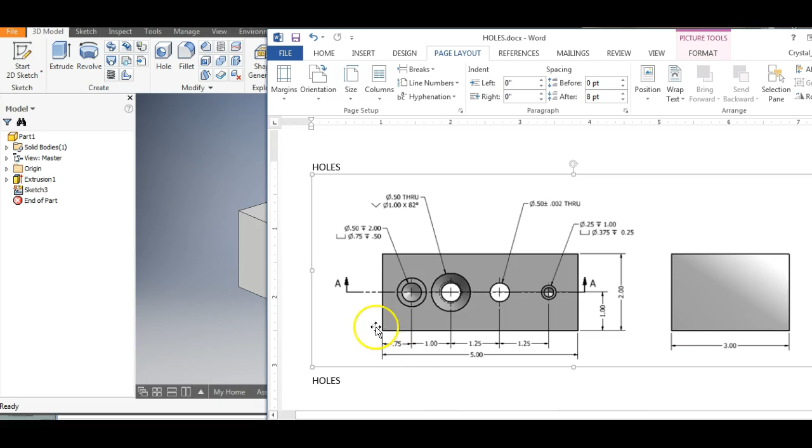Before you make your train, we need to know how to do holes because there's a bunch of holes on the train. We're going to be using the hole feature to make this part. Take these notes and glue them into your notebook. I've already made the basic dimensions and put a point at each one so I can center on it.

I clicked off, finished my sketch, and I'm back in my 3D model. I'm going to click on my first point here, and then click on a hole.

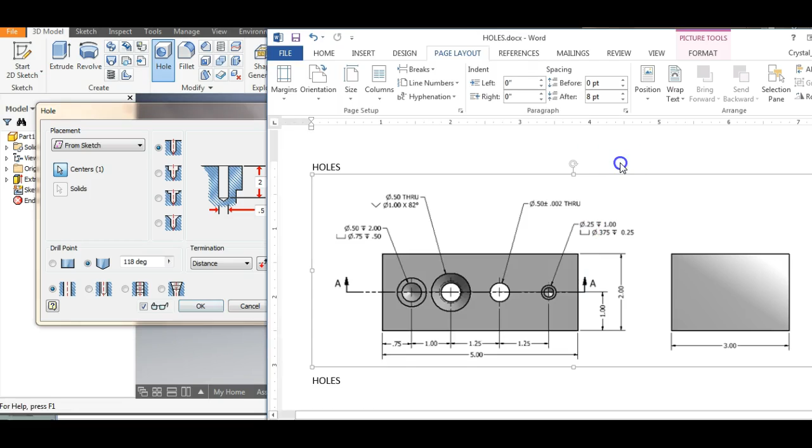When you first look at it, yours probably looks like this. I'll scoot it over so I can see just the first one. The first one is a counter bore, so that's this one here. Yours probably started with through all, but I know it doesn't go through all - it goes a distance.

So I'm going to put these in. I just need to look at these dimensions. This top part is talking about the counter bore, which is this bottom line here - diameter 0.75, and it goes 0.5 down. So 0.75 across, 0.5 down.

Then this part is how deep the whole thing is. The whole thing is 2 deep, so I put in 2 here. And it has a diameter of 0.5, so I put that in.

I also know that for all my train, everything has a pointed bottom, so I want to put this in - I'll go ahead and put that in now. I click OK, and it drew that in. Here's the cylinder part, and then the other part is back in there.

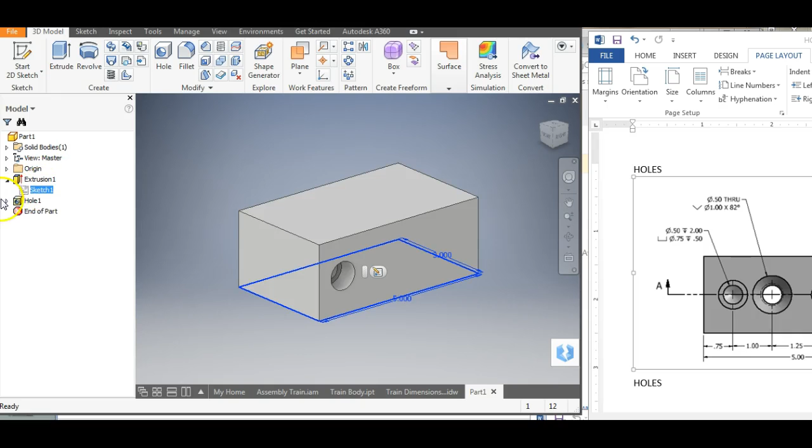Now I'm going to go to my next one. Because I had these here, I'm going to go - this one was where I had all those little points. I'm going to share sketch so I have the sketch out again. So here's my sketch, I'm going to do my next part here.

I'm going to click on just this hole here, so I have that one highlighted. Go to holes - this time, this is a counter sink, so I need to go to counter sink. I'm going to go to this one here.

This time it's not at a distance, it's actually through the whole thing. So I'm going to go here and do through all, so it goes all the way through.

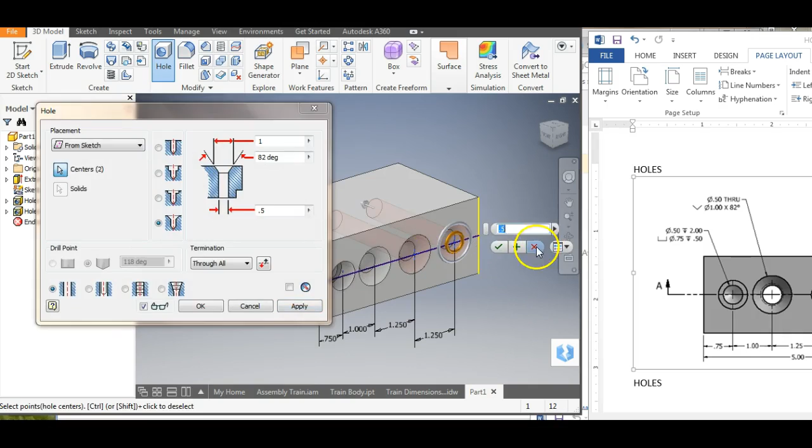The top part, the V'd part at the top, has a diameter of 1, so I set that there, and it has an angle of 82 degrees. Then the diameter of this part is 0.5, so I click that in. Then I click Apply. But it actually did these other ones and I don't want it on those - I just want it on this one, so I click that off.

Go to my third one here, click Holes. I'll scoot this over so we can see it. The third one is through, so it's through all, but it's just a straight through - it looks like this one, and it has a diameter of 0.5.

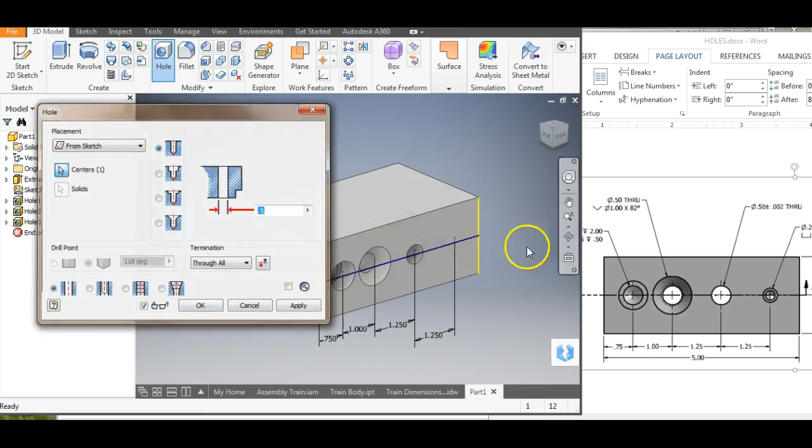And then it gives a tolerance here, which we're not going to show on this part right here, so I just click Apply. So there's that one. And this last one, I don't want it to go there - I want this one to be different.

This one has a counter bore again, so I'm going to do this. Click here.

Hole, counter bore. The diameter of the counter bore is 0.375, and the depth of that is 0.25. It does not go all the way through - it goes to a depth of 1, and it has 0.25 here.

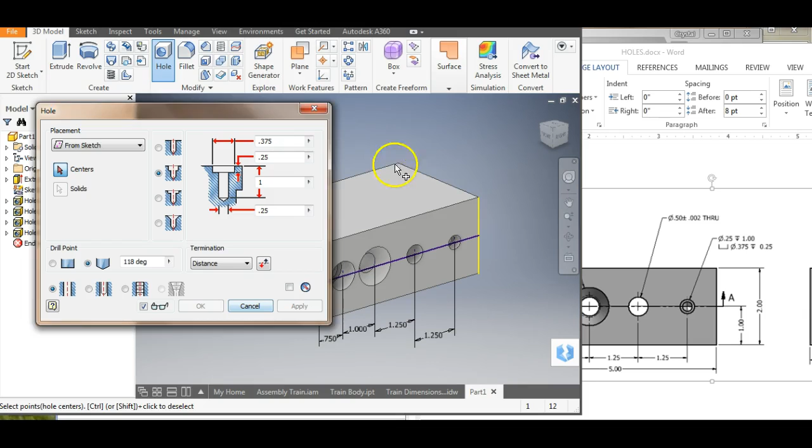Click off of this. Now I want to take and put this onto a sheet to show the views of this. So File, New, I'll put this on this one. Fill this in properly - this should be, we're doing this as part of our train, so we're going to go ahead and do that.

Even though this is not part of the train, this is part of our project so that we know how to do it. Put your name here, last first, your period. And this we're going to call holes.

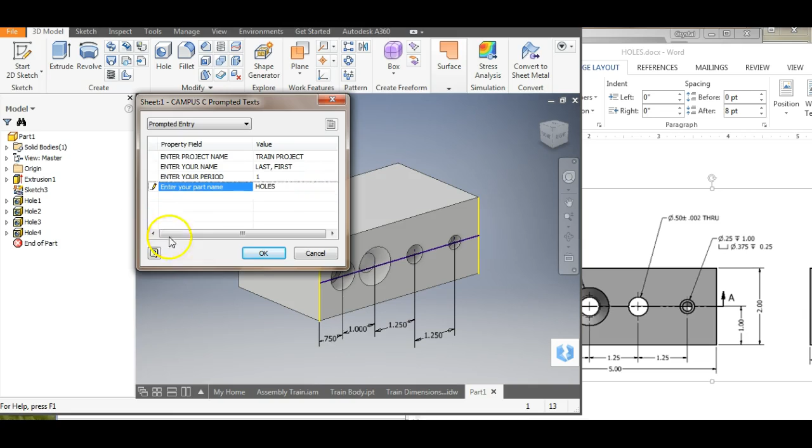Place the part. There we go, that's the view that makes sense. Oops, there's our good front view. Back where it was - it's being very difficult here with me. There we go, click, click, click.

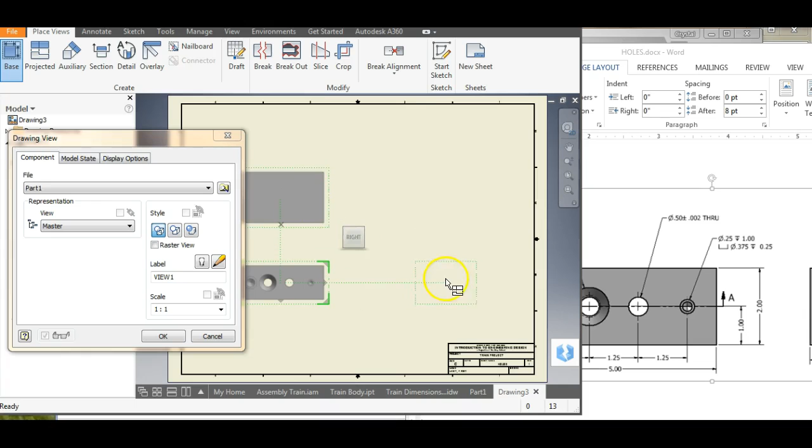Oh, I didn't save it. There we go, we know this should be shaded.

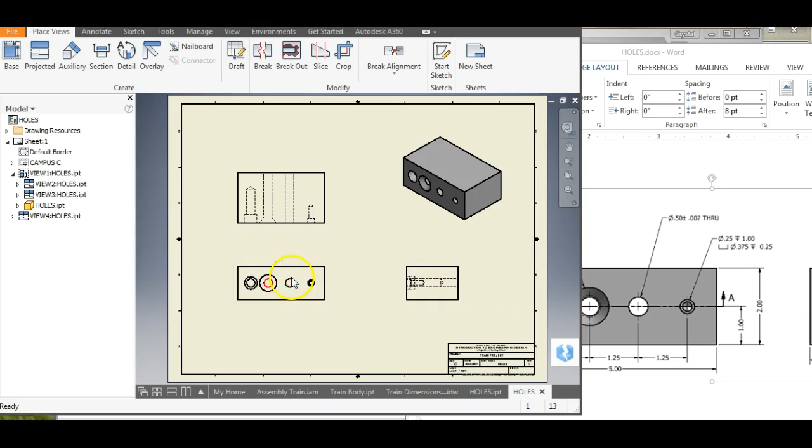Then I want you to go in here and dimension these. Watch the video on how to dimension hole parts that I'm going to do in part 2.